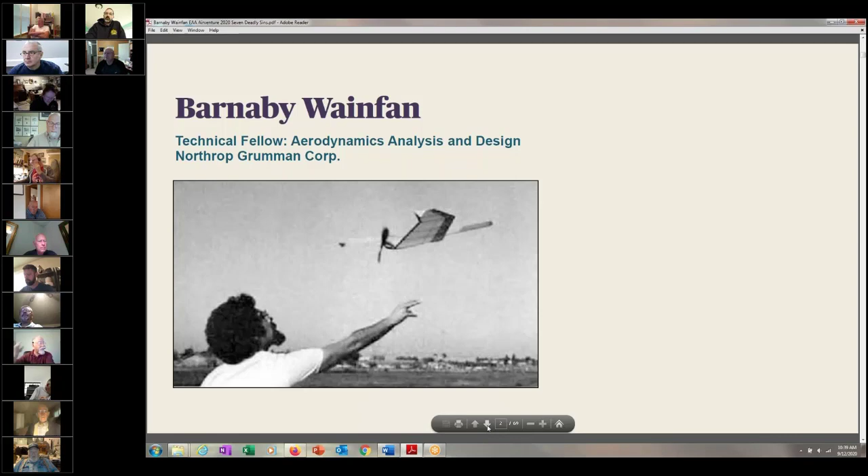As you can see from this picture, I got my love of conventional configurations very early. I am sorry to say I have much less hair than that now, but nonetheless, I've learned a lot in those 41 years, and I'm hoping to share some of it with you today. Here's just a quick snapshot of a few things I've worked on. Some of them will be very familiar to you, obviously. As of today, I've worked on 27 different types of airframe that have actually made it into the air, and I'm far from done.

But the real subject today is about design. I do try to teach design, and what I found is that we spend a lot of time teaching people how to design things right, and where there tends to be a failure of teaching is in learning from the mistakes of the past. And so the subject of today's talk is really about how it gets done wrong, so that we have the wisdom not to repeat those mistakes.

And here's a few quotes just to get us in the proper mood. I hope that this talk helps a little bit for people to become expert enough without having to do what Professor Bohr, the lower right quote, says, of making all the mistakes that can be made in a very narrow field. And of course, one of my favorites is from Norm Howell, who's a retired U.S. Air Force test pilot and a good friend. Norm says that nature is the world's toughest teacher because you get the exam first, followed by the course.

Of course, the other one of Norm's sayings, which isn't directly relevant here, but I've got to relate it, is that all the interesting in-flight emergencies start with a loud bang. Now, I disagree. My most interesting in-flight emergency started with a sudden silence, but, you know, Norm and I.

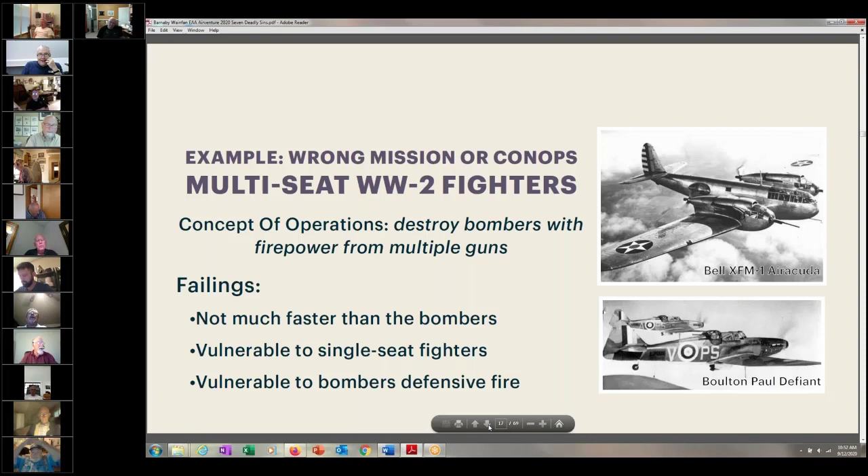Now, in the commercial world, there tends to be a flawed business case. And the thing you see over and over again is a tendency to take what's already being done or what's already important and extrapolate it to the point of complete failure. So if you go through these various ones, I mean, SSTs, and interestingly enough, the idea of supersonic business jets and so forth is coming back again. And they're all based on the idea that what the airlines were selling was speed.

And if you look at it up until the 1960s or so, that was a perfectly valid assumption. Each generation of aircraft was faster than the one before. What originally got people flying was it was a lot faster than trains or ships. And so the idea was the next step after the 707 and the DC-8 was to go supersonic. And the customer base were people for whom time was important and money wasn't.

And what ended up happening about the time the first generation SSTs were being developed is the world changed. Because first of all, the high bypass turbofan and wide body airplanes came along, and that made flying subsonic much cheaper. And secondly, it turned out that subsonic airplanes were fast enough that for most trips you could still get where you wanted to go within a day and have a little bit of useful day left at the end.

Now, this was obviously in the world before the TSA, but nonetheless, on a subsonic airliner, even if you're going Los Angeles to New York or something like that, you're talking 5 to 6 hours. And so the speed advantage of the supersonic airplane was much, much less, and the cost was much, much higher. So it turned out that the only SST that did any prolonged service was the Concorde. They only built 16 of them.

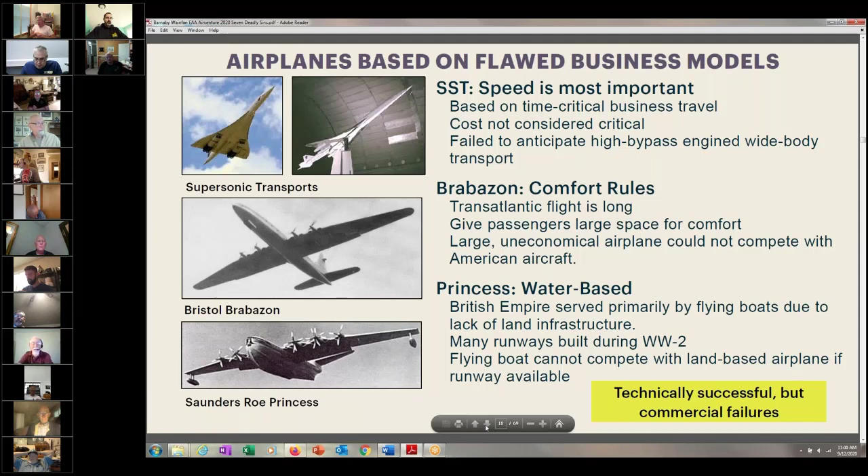But they built 3 Princesses, only one of which flew, and nothing wrong technically with the airplane. It worked as designed, but it wasn't actually useful to the end user to make money. This type of mistake didn't go away 50 years ago. We're seeing the end game right now of yet another flawed ConOps extrapolating to failure, once again in Europe, with the Airbus A380.

The basic concept behind the A380 was that, at the time they started it, long-haul airline operations were hub and spoke. You went from big airport to big airport, and then people would get on smaller airplanes to go off to wherever they were going. And that was the efficient way to do it. That was basically the business model for the 747.

The other idea was we're not building any more runways, so the number of takeoff and landing slots at these major hub airports is finite. Because air traffic control can only handle so many, and particularly with big airplanes, you need a certain amount of separation for wake turbulence. And so the basic idea was that they needed a very, very big airplane to accommodate the increased amount of passenger traffic, because at some point you were going to saturate the hub airports. There was also a bit of prestige at having the biggest airplane.

Well, what ended up happening, of course, was that the airplane was too large for most airports, and they actually had to do a lot of new infrastructure for taxiways and gates to accommodate it. Most of the airports didn't want to do that. Now, interestingly enough, that issue has reappeared with the Boeing 777X, which is why Boeing is now flight testing an airplane with wingfold. The 777X actually has the outer few feet of each wingtip fold up on the ground so it can use standard taxiways and gates.

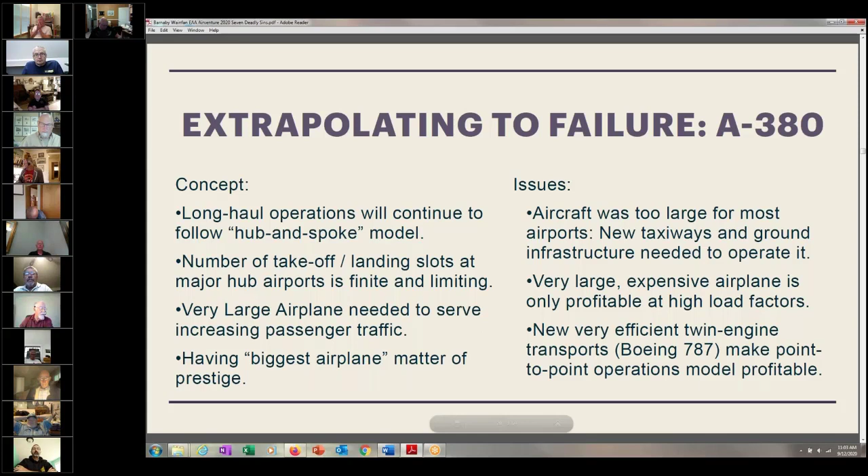And if you take a look at what this did to Airbus, if Airbus didn't have lots of cash available to it from reasons other than selling airplanes, it probably would have put them out of business, because it cost about $25 billion to develop this airplane. And the interesting thing is they never reached what in the trades they were calling break even, but they had actually redefined the word break even, because the production rate fluctuated all over the place, to mean that they were actually charging more per airplane than it cost to build. So they were actually, for most of the production run, taking a loss per airplane that they delivered, which means that they didn't recover any of the development cost, any of the non-recurring cost at all.

In February 2019, they announced the end of the program with an extrapolated 251 total airplanes delivered. By that time, some of the airlines were already retiring their A380s, and of course the current pandemic situation has accelerated that. So the net result is that this program will end up with about 250 airplanes having gone into service, and probably led to a net loss of something like $30 billion for the people who developed it. And all basically because the business model didn't hold together.

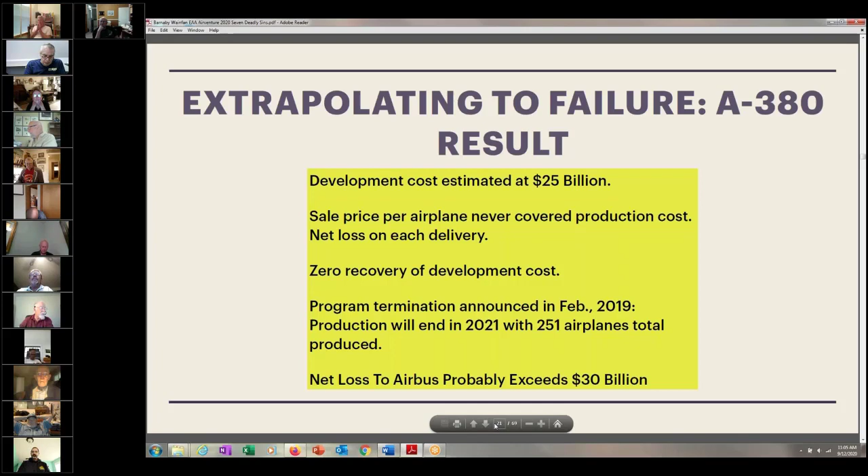Another thing that can happen is that you can over-constrain the design. You can either ask it to do too many things or put too many limitations on it, and all of those things affect the airplane, and it becomes difficult to impossible to make an airplane that will actually meet all those requirements and do the mission effectively.

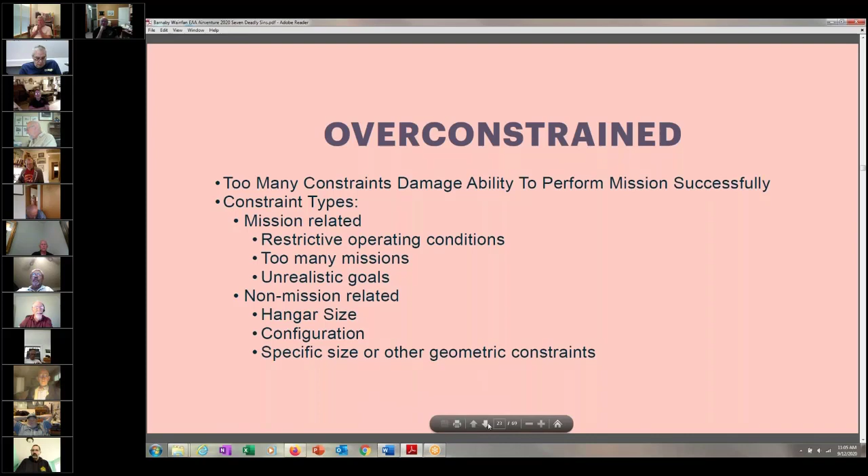One good case study for this one is the F-111, which ended up actually being built in various forms because it wasn't a total failure, it was a partial failure in some respects. But the original idea for the F-111 was that it was going to be an airplane that was going to be operated by both the Navy and the Air Force.

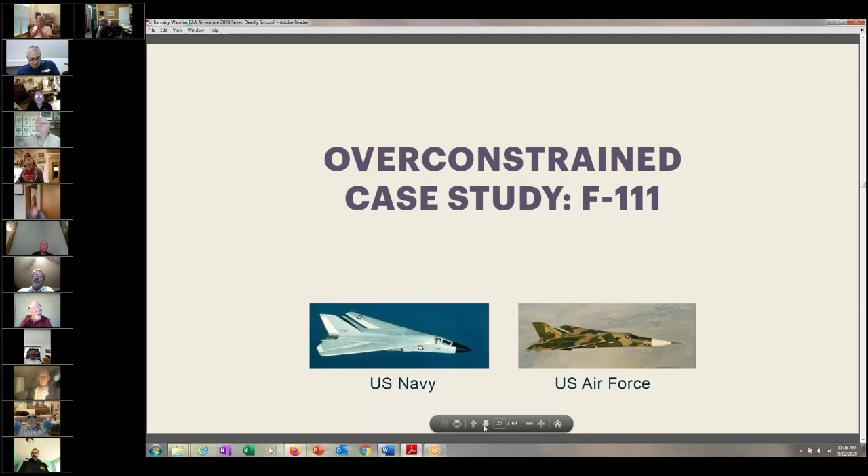And, for those of us who are students of history and are watching current events, some of this should sound very, very familiar. It was a program called TFX, Tactical Fighter Experimental, one of the amazingly many things Robert McNamara got wrong. And the idea was that one airframe was going to fulfill multiple missions. It was going to be the fighter and interceptor for both the Air Force and the Navy. So it was going to do intercept, counter-air, fleet defense. And it was also going to be a strike aircraft for both the Air Force and the Navy.

And the basic idea here was, because it was a common airframe, you were going to get enormous economies of scale and make it cheaper for everyone to build a force structure. I'm sure some of this sounds familiar, even if one reads current events.

But if you take a look at what that meant for the engineering of it all, you have all of these requirements. First of all, the airplane was required to be supersonic at sea level, Mach 1.2 at sea level. And the loads on the airframe are just ferocious for that. At the same time, it had to go a long way subsonic and have long loiter for fleet defense. It had to be carrier suitable, and it was a 2-crew aircraft, and given the state of the avionics and the equipment at the time, it was decided that you needed to have good crew communication, which led to the following

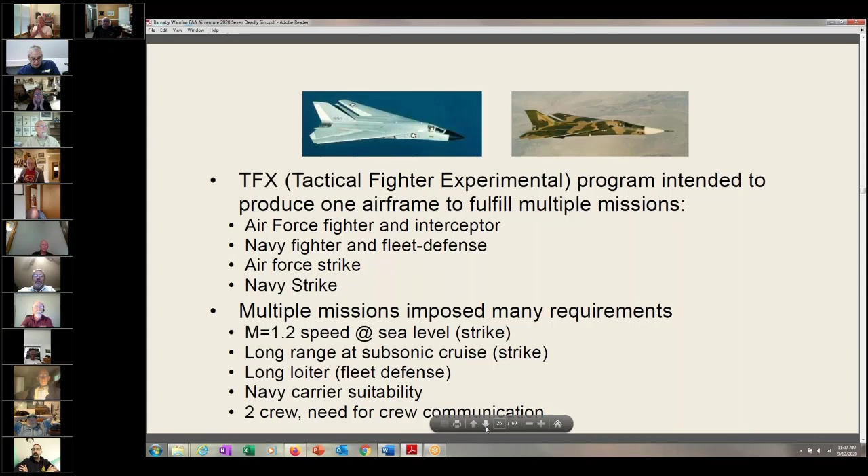engineering decisions and requirements. The reason the airplane ended up being a swing wing of variable geometry was because the high-speed, low-altitude mission is incompatible with the subsonic loiter and range mission for the same geometry. If you're going fast at low altitude, you need a slim, highly swept, high wing loading airplane, like a delta wing. If you're trying to go longer subsonically, you need more span, lower induced drag, and a higher lift to drag ratio. And also, you're not going to get a slender delta on and off a carrier.

They decided that you needed side-by-side seating for good crew communication, and in order to have low enough drag to be a good supersonic airplane at low altitude, bury the cockpit for a flush canopy. All of these requirements made the airplane very heavy. One of the requirements was for the crew to be able to successfully eject at Mach 1.2 at sea level, and of course the dynamic pressure there is ferocious.

So it was one of 2 aircraft to end up in service that actually had an escape capsule rather than ejection seats. The whole cockpit ejected as a unit. The other airplane that did this is the B-1 with very similar requirements. And of course, the high dynamic pressure at Mach 1.2 at sea level made the airplane very heavy.

So how did all of that turn out? Well, the Navy airplane never saw service. It was too big and too heavy to ever really achieve carrier suitability, although they did manage to do some demonstration takeoffs and landings on carriers.

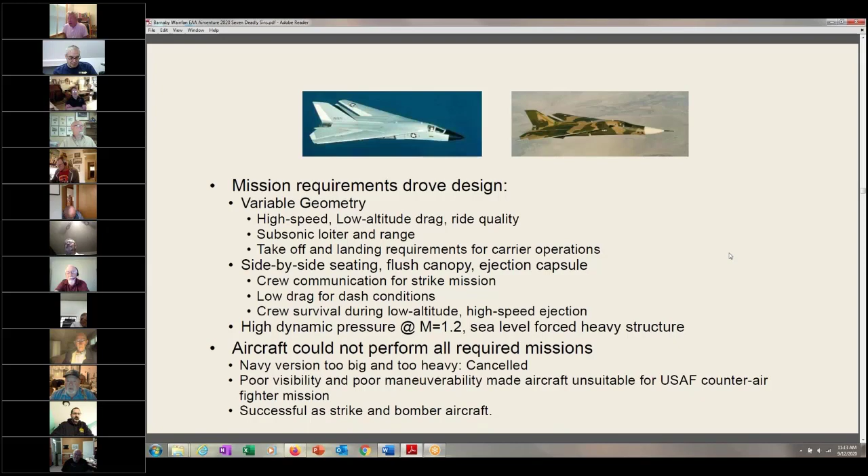Another quickie, this one, once again from Britain, and I'm not slagging on the Brits, by the way, but they did an awful lot of interesting things over a lot of history. I mean, any country that brought us the Vulcan and the Spitfire can't be all bad in the aviation world. But here's an example of where one little constraint ruined an otherwise good airplane.

So once again, committed to combat over Europe, took pretty severe losses from ground fire, particularly in daylight operations. Even in night operations, it got hit pretty badly compared to the Lancasters and later, the American bombers. And so was eventually withdrawn from service over Europe and used for maritime patrol and things like that. But this is an example of a case where one single constraint took an otherwise good airplane and created a critical vulnerability.

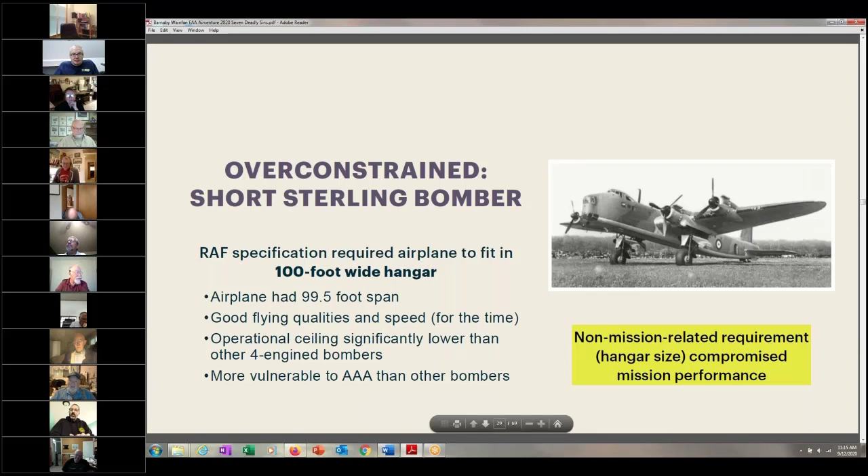Okay, moving on to something depending on new technology. We always try to advance the state of the art, and a new technology, if it works, can give you a great advantage. But if it fails and the project is dependent on it, the whole airplane fails. And of course, we tend to be optimists. This is one of the other themes through all of this. We're all optimists at the beginning of preliminary design, and then get our steady doses of reality until we're at, okay, now does this thing still work?

So if it's not an experimental program, if it's a program where the airplane actually has to work and go into service, it's very important to have a plan B if the advanced technology doesn't pan out, or at least be aware that that could happen.

Case study here, this dates back to the early 1970s, at a time when, and once again, this is another kind of overlapping sins, the ConOps that was being developed, people believed at the time that in the future, which to us now is the relatively recent past, military aircraft were going to go all STOVL or all VTOL because runways were too vulnerable. And so there was enormous amounts of work being done on developing VTOL fighters and other aircraft.

When I came out of engineering school and started my engineering career, the Navy believed that the big deck carrier was dead and they were going to have smaller ships called sea control ships, and they were developing two types of aircraft, type A VSTOL, which was going to be a fighter, and type B VSTOL, which was going to be a patrol aircraft to replace the S-3. And this aircraft here was an X-plane developing a whole new system of generating vertical lift. It was called the XFV-12, developed by Rockwell.

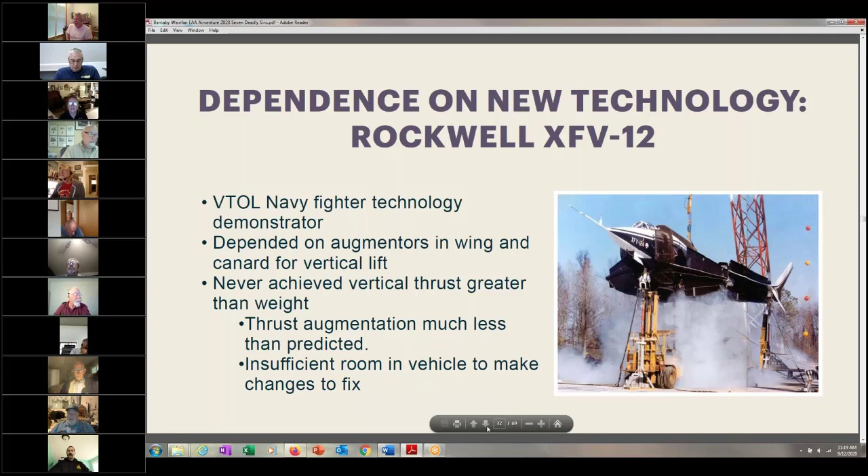But sometimes you have a situation where you have no choice but to try to use new technology. Sometimes you get a mission specification where you have to invent something to do it. And then basically you're betting your program on making the new technology work. And a good example of that is the Joint Strike Fighter.

But basically, if you look at this from an engineering viewpoint, each of the companies, because the airplane had to be a short takeoff, vertical landing supersonic fighter, made a bet on a new technology. So Boeing decided to stay low risk on their propulsion system. They said, what we're going to do is refan basically an F-22 engine, an F119 engine, to increase the mass flow and increase the static thrust.

We're going to use a proven Harrier-style vectoring nozzle system and direct lift because we know that works. That somewhat limited the amount of vertical thrust they could get, so they ended up having to make an airplane that was very light. This is the reason for the low aspect ratio delta wing configuration.

And frankly, even though the airplane is not one of the most beautiful things to ever fly, if you look at the structural integration of the airplane and some other details of how it was done, it's a very clever design for trying to build a structurally weight-efficient airplane to keep the weight down and still get the aerodynamic performance. But that didn't quite get them where they needed to get, so they were going to use a new thermoplastic resin system in the wing skins to save weight.

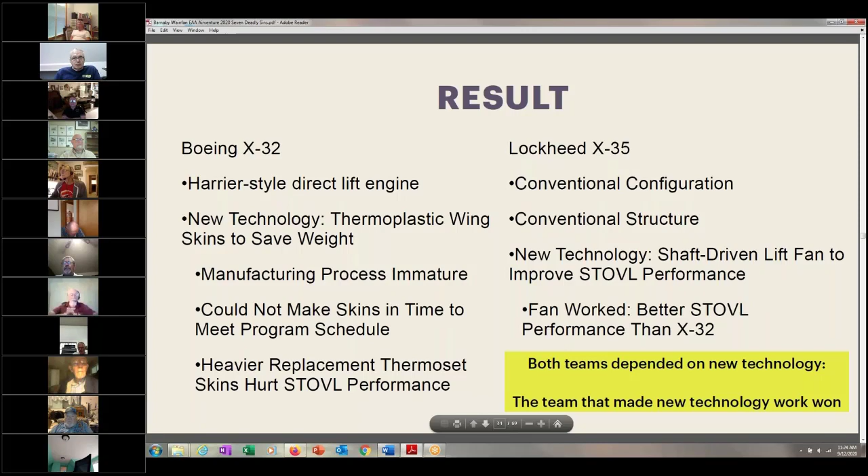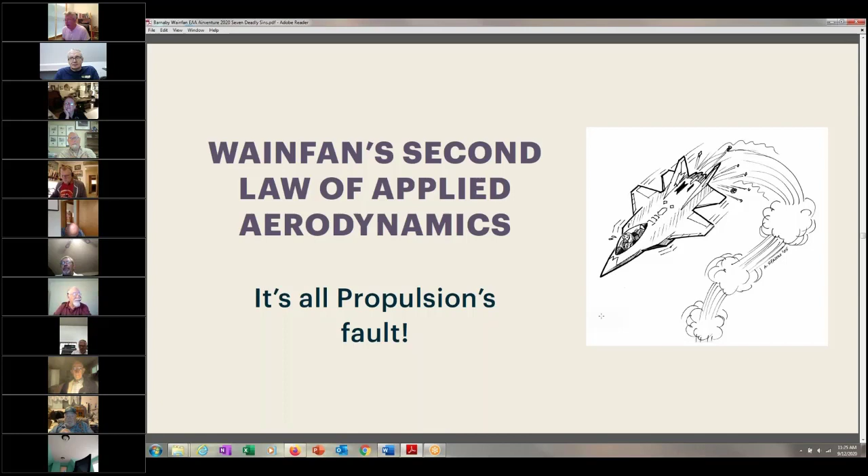But the real point here is that unless you're building a glider, the success of the airplane depends on the success of the engine. And the engine has to perform up to snuff. And if the engine doesn't deliver either in weight, thrust, fuel consumption, or reliability, the airplane suffers and may, in fact, turn out to be either useless or not meet its performance guarantees at all.

It's also a caution for airframe designers that you never design an airplane to the ragged edge of what the engine is supposed to be able to do, because aero guys and airframe designers are optimists too. And if the airplane ends up heavier or higher drag than predicted, which they almost always do, and you're designed to the limit of what the engine can do, you're going to end up falling short in performance.

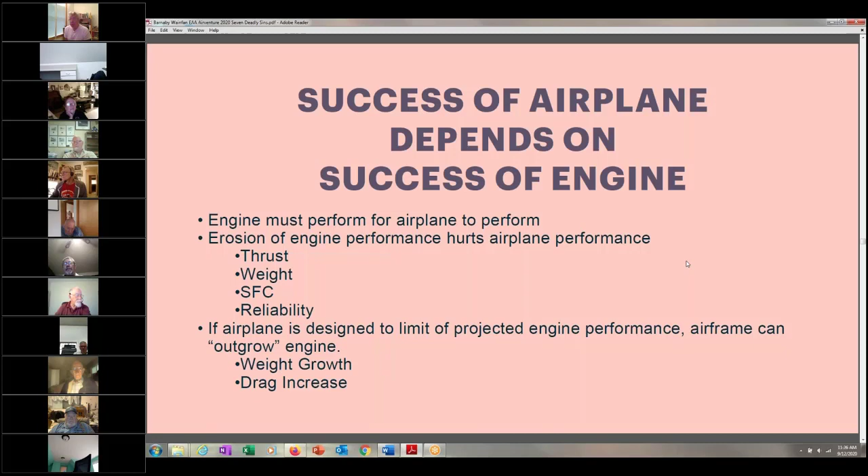So a case study here is one those of us who have been going to Oshkosh for years will recognize. It is, in some respects, one of the examples of Barnaby's law of aviation startups, which is the probability of success of the company is inversely proportional to how big their tent is at Oshkosh when they go up with their non-flying prototype or mock-up. And I think people remember Eclipse showing up with this enormous pavilion and this airplane.

But here's the basic idea behind the Eclipse. It was a very light jet intended for air taxi operations and personal use. And it was based on an engine that was being developed by NASA. A couple of years before the Eclipse appeared, Williams and NASA brought in a scale-built airplane called the Williams V-Jet to Oshkosh and announced, and this was when NASA still put a good bit of money into general aviation-related programs, that there was a new program called GAP, General Aviation Propulsion, and Williams was going to develop a 700-pound thrust turbofan engine that in full series production would cost $40,000 a piece.

Well, you know, a whole lot of people declared the miracle had occurred, that the piston engine was dead, and by 2005 we would all be flying jet Bonanzas, and only a few puddle jumpers and people flying antiques would still be using piston engines.

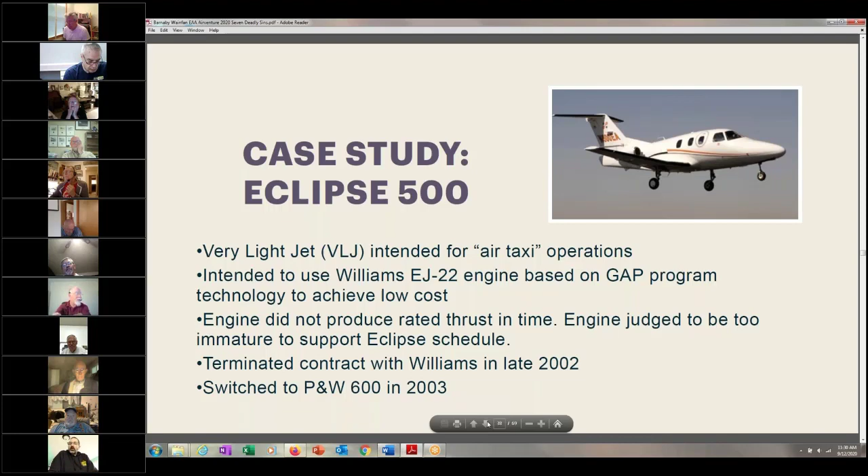So in any case, in 2002, Eclipse terminated their contract with Williams, went to Pratt & Whitney and switched to the Pratt & Whitney 600 engine. The Pratt & Whitney 600 engine had higher thrust, was a good working engine. And then the dominoes started to fall. Because first of all, the program is now 3 years behind schedule. The price of the airplane has now risen because originally Eclipse claimed that with this magic engine and some good manufacturing technology, they could actually deliver the airplane for less than $1 million. By the time they actually had a certified airplane to deliver, it was 2.1 million and rising.

Higher thrust engine, which of course burns more gas. So even with the modifications to put tip tanks on it and an 850-pound gross weight, 18% gross weight increase, they still were 12% down on range from the original projections. All of which, of course, makes the airplane less desirable. But the most important thing is their business case fell apart because part of the whole idea behind Eclipse was that they could offer a much cheaper airplane with these new magic engines, and that was the reason to buy an airplane from a startup company.

Once you're competing with Cessna, delivering an airplane which is powered by the same engines as the Cessna, because Cessna developed the Citation Mustang around the Pratt & Whitney 600 engine, the 600-pound gorilla is back in the room. And business jet operators and private jet operators, the thing they care most about is reliability and dispatch rate. They care a bit about cost, they care a bit about fuel burn, but they want their airplane to be ready to go when they want to go. Those airplanes are for on-demand transportation.

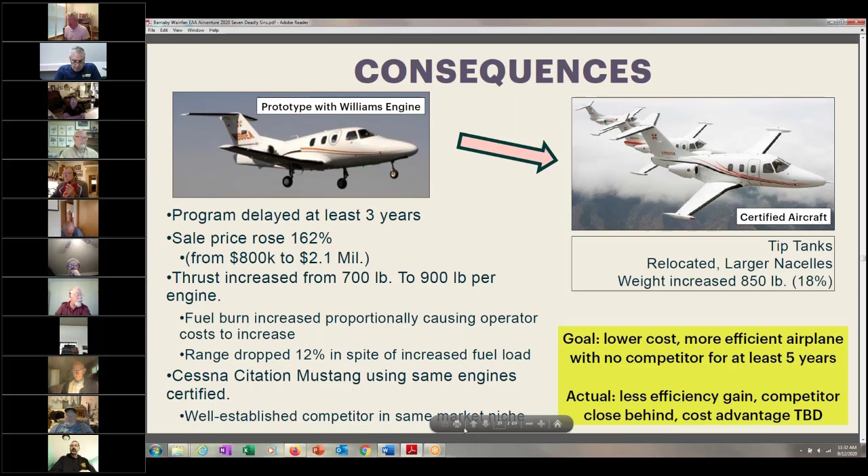And of course, with a Cessna product, because they're very good at it, they build reliable airplanes and they've got great service. And if you're deciding to buy an airplane, that 5 years from now, if I'm down somewhere and my left outboard flap actuator is broken, I can call Cessna and have one there in a day and get my airplane back in the air. And I don't even know whether Eclipse is still going to be in business. So in the end, the business case for Eclipse fell apart, leading to this very long tail of woe.

The original Eclipse delivered 259 airplanes, a lot of which were in an interim configuration because they were developing the avionics, they were developing a lot of things. So some of them weren't even IFR legal when they were first delivered. In 2008, Eclipse went bankrupt and a new company bought the assets basically to support the owners. Just to add insult to injury, in 2011, there was an AD on the Pratt & Whitney engine, which fortunately was eventually relatively quickly resolved.

And this Eclipse Aerospace was trying to get to the point of building airplanes. I don't believe they ever finally did succeed in delivering new airplanes. And they were eventually merged into a company called One Aviation, which was developing both an advanced version of the Eclipse and a turboprop airplane called the Kestrel. And then in 2018, One Aviation went bankrupt. Now, I read about a week ago that One Aviation may in fact have found a buyer, and so we may see yet another iteration of the Eclipse.

But at this point, we're somewhere between $2 and $3 billion into this saga to get about 250 airplanes into service. And it all goes back to the fact that the whole program was dependent on the promises of an engine.

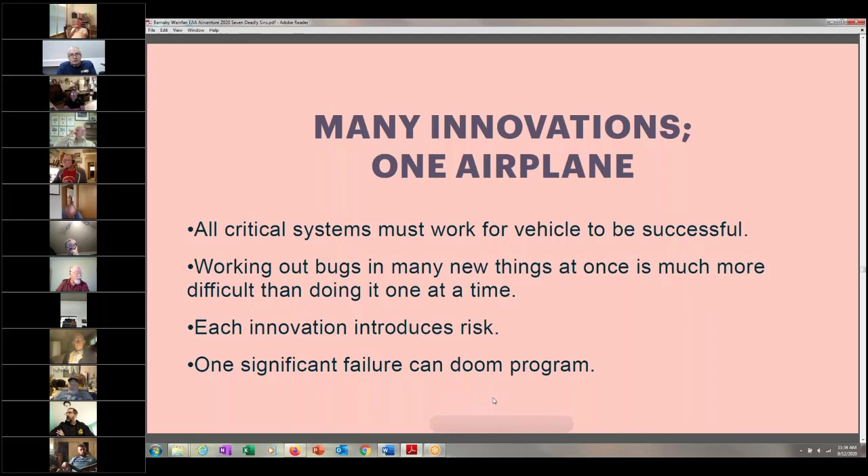And so the real lesson out of that is use the innovation where there's a chance to get a big benefit. And otherwise, stick with conventional practice and just make it work. Ironically, by the way, just a story from my history, if you look at the Facetmobile, it used very conventional materials and what I believed at the time to be a very conventional propulsion system because I was taking a lot of risk with a radical configuration. Well, of course, the great irony for me, it was the very conventional propulsion system that failed and put me through a fence. The radical part worked great.

But nonetheless, a quote from Freeman Dyson, and this rings very true for me because I'm an engineer who was raised by two scientists. Both my parents were research scientists. A good scientist is a person with original ideas, while a good engineer is a person who makes a design that works with as few original ideas as possible, because that's the low-risk design.

So here's a case study, and once again, this is slightly forgivable because it was an experimental airplane, but they tried to test everything at once. This was the Lockheed X-33, which was a test vehicle to prove technologies for a single-stage to orbit space launch vehicle. And if you look at this thing, it had a huge number of innovations in it. It had a type of engine called a linear aerospike that had never been flown before, a whole new type of rocket engine. It had composite cryogenic tanks for the liquid hydrogen. It had a whole new metallic system for thermal protection and a new lifting body aerodynamic configuration, all wrapped up into one.

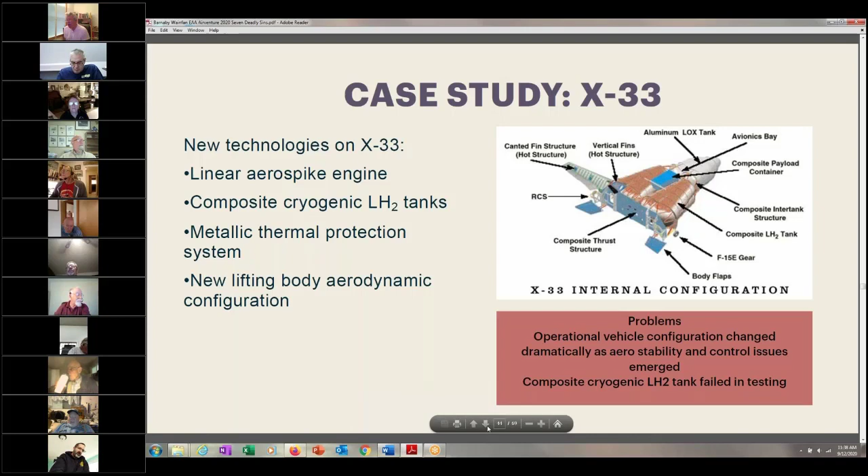Related to that is a design margin. It's very tempting when you're starting with a new design to eke every last tiny little bit of performance out of it everywhere, and to design right to the very limit of what can be done. Well, if you have to do that to get an airplane that meets your design specifications, you're probably going to end up falling short, because there's a lot of ways that you can end up doing not as well as you wanted.

The airplane almost always ends up heavier than predicted. Sometimes the engine doesn't produce as much thrust. Sometimes it burns more fuel. Aero, the drag may be higher than predicted. And even if you get everything right, your customer will always want to add more payload after you build the airplane.

So what it means is, when I design an airplane, I want to make sure that there is some margin, so that either the airplane can do a little bit more than it was designed to do, or there's straightforward ways of changing the airplane to get that extra little bit to meet the requirements as these things happen.

Now, this is one of the reasons why the conventional wing body tail airplane has lasted for so long: it's relatively easy to change. You can put a bigger wing on it, you can put different flaps on it, you can put a bigger tail on it. The podded engine arrangement is great in the airliner world, because you can take those engines off and put bigger engines on. There's lots of ways to change that airplane.

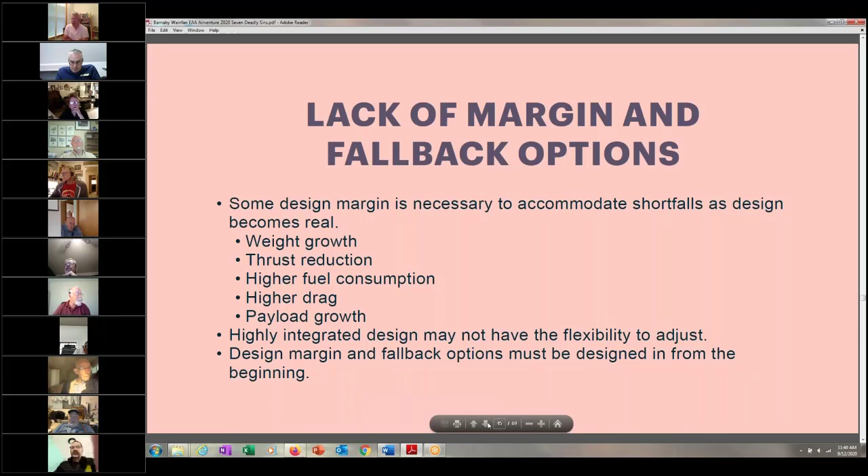And a case study for that is the A-12 attack airplane that was designed for the U.S. Navy. I have a certain amount of personal culpability in this one, because the A-12 program actually started as a result of an unsolicited white paper from Northrop that I helped write. And it led to a competition in which the Navy eventually chose the other guy's airplane. There's a good book about this program called The $5 Billion Misunderstanding, which I highly recommend, because it's a great case study in how not to develop an airplane.

In any case, General Dynamics and McDonnell made promises that they could do things that Northrop was not willing to promise they could do. They got the contract, and then it turned out they couldn't do it. Because basically what happened with this airplane is, as they started building, it ended up much heavier than they predicted, because they were very naive about what could be done with composites. And if you look at the configuration, there's literally nowhere to go as the weight starts to grow, because it's a pure triangle.

You can't put a bigger wing on it. It is the wing. You can't change the sweep angle, because everything's integrated, and the wingtips will hit the island if you do. Because it's a tailless airplane, there's no way to put more flaps on it to get more lift. And so they were stuck. And eventually the predicted weight of the airplane grew to a point where the wind over deck required to launch it exceeded the top speed of the carrier. And at that point, the program was canceled, and it was actually canceled for default.

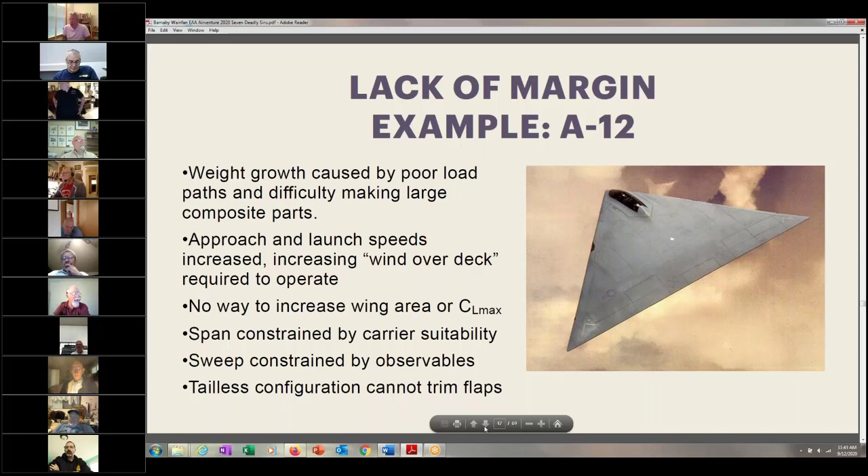And as I said, this was a very, very expensive mistake, and it all started because Northrop wrote a white paper saying we can build a baby B-2 to get on a carrier, and the government decided to compete the program instead of giving it to Northrop individually. So I guess I can claim to have helped start one of the worst debacles in the history of American aircraft procurement, but it wasn't my fault.

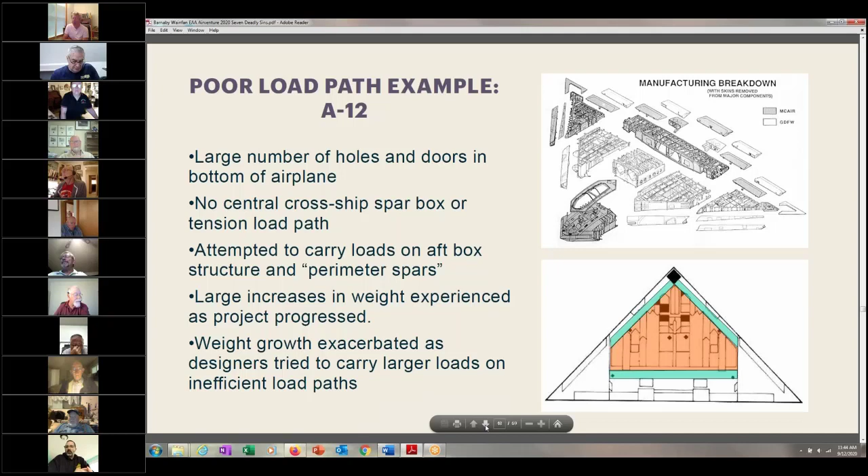Okay, getting on to our last one, and this is once again very common in EAA and common in other areas, is falling in love with a configuration and letting the concept drive the design instead of the mission. And the reason this is done is because people believe the concept offers some vital advantage. And at some point, preserving the concept becomes more important than the suitability of the configuration for the mission.

Now, the advantage may be real, but sometimes it either doesn't apply to the mission very well, or there are offsetting disadvantages. So even though it does the thing that people believe it does, there are other things it does that are worse.

And one warning to a designer is if you start having to make lots of compromises in your design to keep the concept pure, like, for example, having to put in movable ballast to make a weirdly configured airplane balance, or as we'll see in a moment in the case of the Starship, having to use a variable geometry canard and invent a new flap system, the concept is probably trying to tell you it doesn't want to do what you're asking, and it's telling you that it's not suitable for the mission.

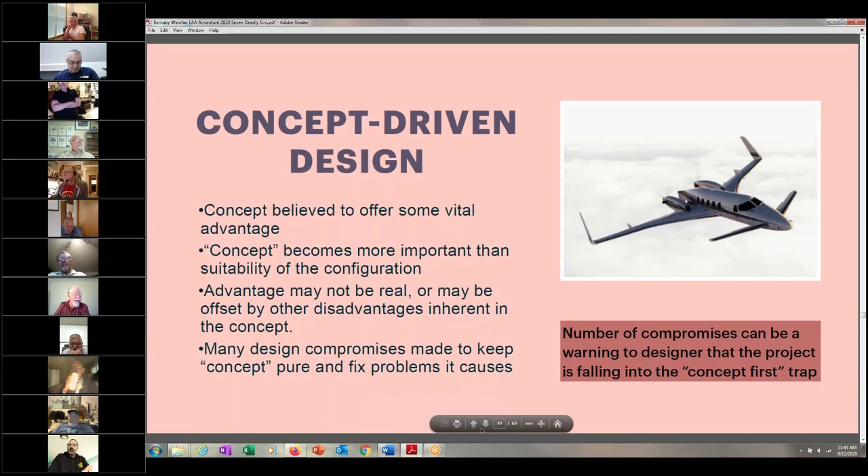And this is an issue that's gone on in history, because it seems like every era there's a magic configuration that everybody thinks is the answer to all problems. So I'm going to just flip through a couple in history without going into any detail. But if we go back to, for example, World War I, we had triplane fighters. And once again, sometimes some of these are successful, but they also have drawbacks that cause a short life.

More recently, the aft tail pusher concept. And once again, you guys will probably recognize most of these airplanes. A couple of them actually met their performance numbers, but weren't particularly successful commercially, and a couple of them were total disasters. Lots and lots in history on canard business airplanes, and we'll get into that in more detail in a moment. And more recently, a lot of interest in what people are calling a blended wing body, which is sort of a flying wingish configuration.

Once again, none of these configurations are first order stupid or a bad idea everywhere, but they have areas where they may offer an advantage and areas where they're not, and it's very important to make sure the mission drives the design, not the configuration.

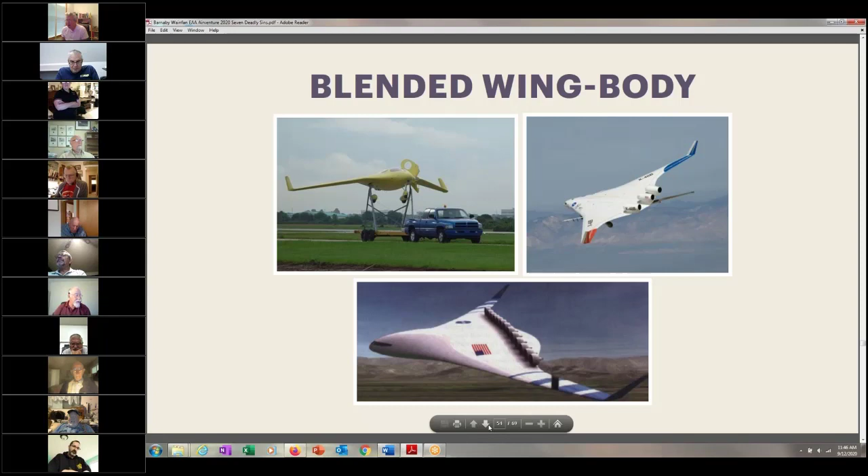So the last bit of this talk is going to be a case study about such an aircraft that actually made it into production and then failed rather spectacularly. And I want to preface this by saying that some very well-known and very smart people were associated with this program. And I'm only doing this case study as an example of how a program can get away from you. And this is in no way intended to be critical of or to put down the brilliant people who found themselves involved in this thing and gave it their best to make it work.

So the basic idea here. This is the Beech Starship, and the basic idea was that Beechcraft was building the King Air, and they wanted to get into the 21st century with a very advanced new business turboprop to replace the King Air. And so, they went to Scaled and ended up with the design for this airplane called the Starship.

Now, I've heard the story that this is not really the configuration that Burt Rutan really favored the most. He really wanted to do a 3-surface airplane, but because Beechcraft had already seen drawings of the Piaggio Avanti, they wouldn't let them do a 3-surface because they were worried about proprietary data issues. I don't know whether that's true or not. I know Burt later did do a 3-surface airplane called the Triumph, so there may be some credibility to that.

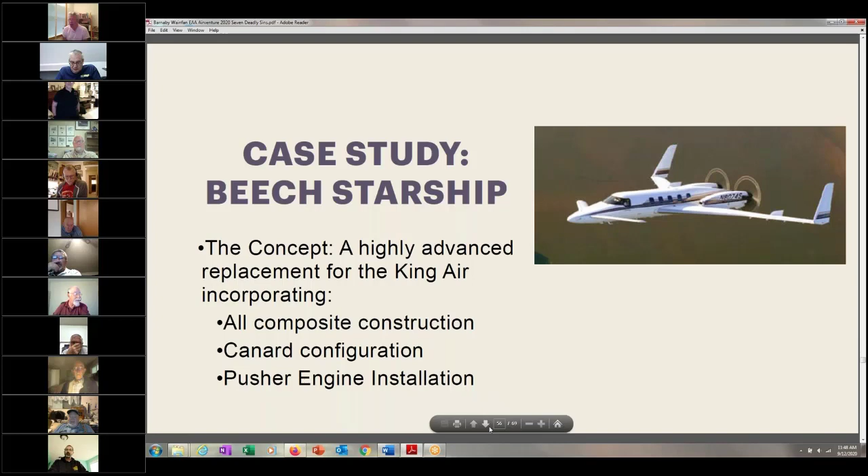But in any case, the whole idea here was, it was going to be an all-composite airplane. The canard configuration would supposedly take the advantages that have been demonstrated with the Long-EZ and pusher engine installation to make everything quiet and efficient. And so I'm not going to read all these, but these are all the advantages that were originally claimed for the configuration.

Well, how did it turn out? Well, if you just look at numbers, not very well. Both of the airplanes had about the same useful load. The Starship had 41% more power than the King Air, 700 horsepower more, and that brought 4.5% or 13 knots in cruise, and that's if you believe the manual. At the same time, the Starship was 20 knots faster stall speed, which is not good. It took almost 1,300 feet more runway to take off, and 500 plus feet more to land.

So if you simply take a look at this and say, I'm presenting the head of the aviation department of any business with the pilot's operating handbook for these 2 airplanes and deciding which one to buy, and the Starship costs more, it's a pretty straightforward decision.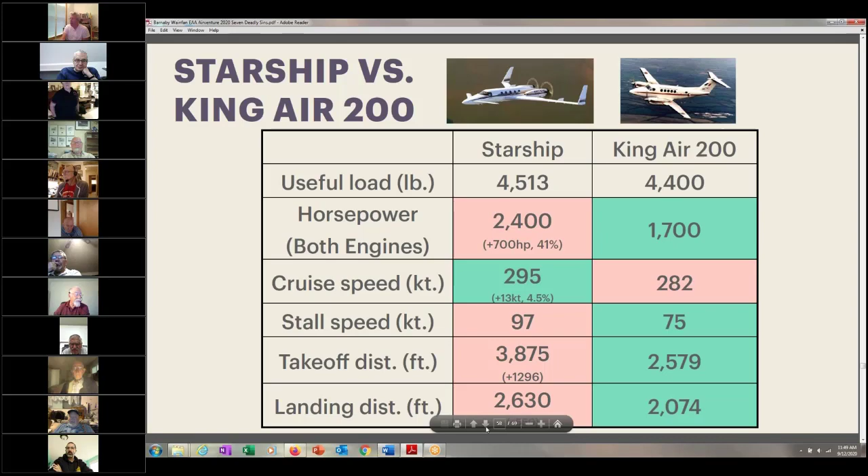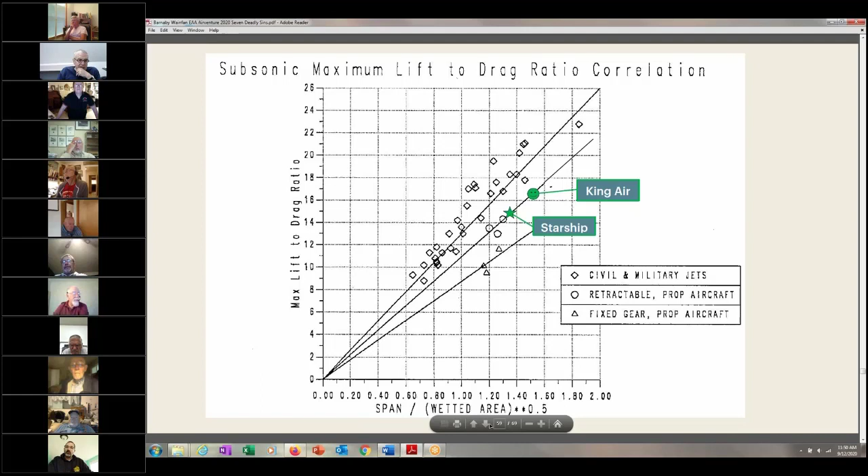But if we work that down once again into the weeds, you can see that the Starship had 350-ish square feet more wetted area than the King Air. So it was worse on that parameter. Also, because they were not able to get the weight savings they expected from the composites, it was almost 2,000 pounds heavier. And one interesting thing is when they started the Starship, the actual FAA max gross weight limit for an FAR Part 23 certified airplane was 12,500 pounds, which you can see for the King Air. Well, partway through the Starship development, the FAA increased that to 14.5, and I can only attribute that to lots of lobbying on the part of Beechcraft, because if Beechcraft had to fly the Starship at 12.5, it would essentially have no useful load, or it would have half its useful load.

And so what it turns out is that because the useful loads are the same, the useful load fraction of the Starship is less too. It's carrying less of its takeoff gross weight as useful load. So the Starship, in addition to being aerodynamically less efficient, is basically for the same payload toting a ton of extra airplane around. And it turns out that the transport efficiency of an airplane is directly correlated to the product of useful load fraction times lift to drag ratio, or span over the square root of wetted area.

So from first principles, you can see that you would expect the Starship to be about 3/4 as efficient at transporting payload as the King Air. And as a matter of fact, if you go do the detailed numbers, that's exactly what happened. And the sad thing is this is all knowable from first principles and could be used essentially to disqualify the concept from the start.

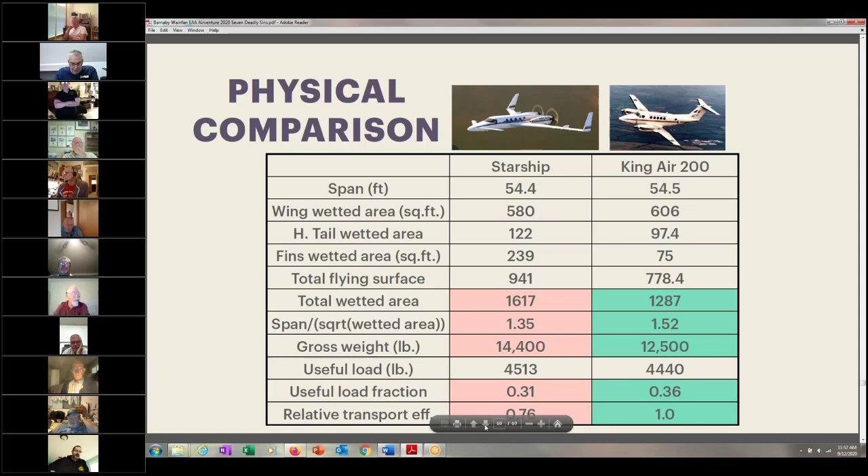And then they ended up, and I feel for these guys, they ended up getting bit by a lot of secondary things. Once again, I'm not going to go through this in detail, but what they ended up with the composites is that they tried to use composites in areas where composites weren't the lightest solution, because composites are very good for areas where there are high concentrated loads and you need high stiffness. They have high strength to weight there. But composites can't be allowed to buckle or wrinkle because they crack. And so anywhere where you're sized by minimum gauge, composites get heavy.

And also because composites are brittle, the FAA requires a higher factor of safety. They require a factor of safety of 2 on composites as opposed to 1.5 for metal. It was an early composite design, so they were very conservative. So in the end, the airplane ended up heavier in composites than it would have been if they built it out of metal.

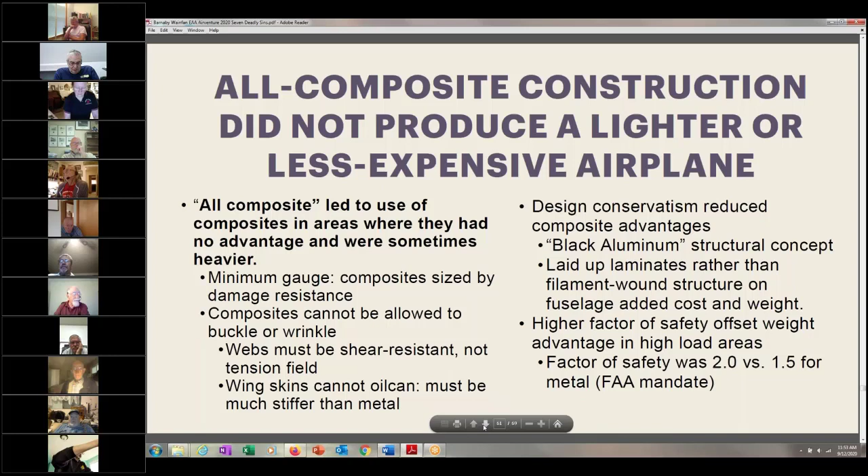And then once again, another lovely cartoon from Aldo. They got bit by a bunch of surprises caused by the unconventional configuration. And I'm going to go through all these pictures just to show you all the things that ended up. But one of the first things that happened is the Starship had a very interesting high lift system. Because the flaps are all the way in the back, you can't trim much flap with a canard without it pushing the nose down. So it was arranged with a variable geometry canard, so the canard swept forward as the flaps came down to compensate for the nose down pitching moment of the flaps.

Well, it turns out that the FAA requires you to stall the airplane not only in approach configuration, but in cruise configuration. And in approach configuration, you got the classic canard pitch nod, as the Long-EZ is famous for. The canard stalled first, the airplane pitch nodded, self-recovered, everybody's happy. But it turned out when you swept the canard back, it changed the aerodynamics of the canard enough that the main wing stalled first and the airplane pitched up. And the FAA said, that's not acceptable, you can't do that.

So they ended up putting vortilons on the wing to cure that pitch up. And they were successful. And they also ended up putting stall strips on the root of the canard to make it let go at a slightly lower angle of attack. And everybody's happy.

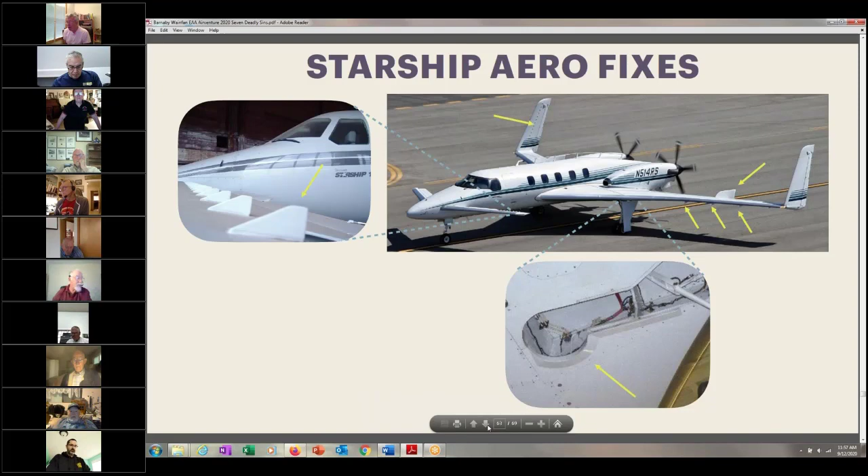So in the end, they built about 50 airplanes. Most of them were not sold. Most of them were leased. I think only 12 to 14 of them were actually delivered to a customer who paid full price. After a while, Beech decided, as the airplanes started to come back from lease, mostly from people who ended up buying Premier business jets, they didn't want to support this orphan fleet of airplanes.

There's about 5 Starships still flying, and one of them is owned by a gentleman who believes that the end of the Starship program was a terrible sin against all that is good in aeronautics. And he actually went to the scrapper and bought all of the spare parts and systems from most of the airplanes they scrapped. He's got a hangar full of parts that are probably enough to keep his Starship flying for 100 years.

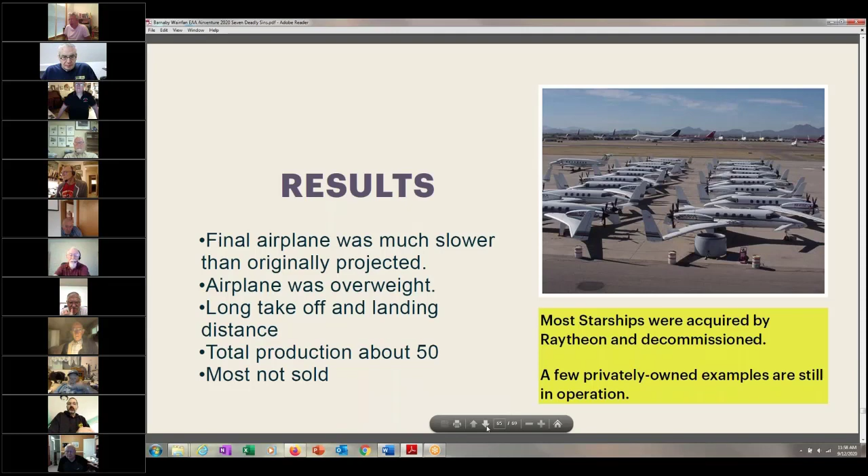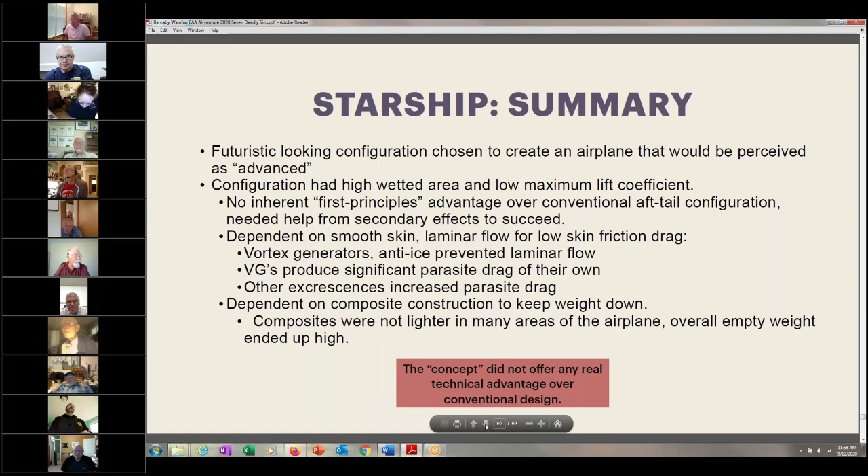So I'm not going to go through all this, but the real message here is that if you look at the concept from first principles, it was actually inferior to the airplane it was supposed to replace. And by falling in love with the concept, they lost sight of what the airplane was really intended to do and ended up at great expense producing an airplane that didn't perform as well as the conventional airplane it was supposed to replace. And so with that, a few bits of distilled wisdom.

These are Barnaby's rules for designers: you design for function, not design features, because a well-formed design beats a bunch of fixes flying in formation every time. That said, details do count. It's possible to scrap a good design with bad details.

One lesson from the Starship is you never, ever show a customer a configuration you do not want to build. If you show a customer 4 options, and option number 3 is a gratuitous straw man that you absolutely have no desire to build whatsoever, but you wanted to make sure it looked like they had a lot of choices, I guarantee you that is the one they will pick, and you will have to try to make it work. Like I said, there's a bit of story that the Starship was that.

Most problems warn you. So what looks like a negligible problem today is the seed of tomorrow's disasters. So fix it now, because you can't fix it later once the airplane is built. In the modern airplane world, there's a belief that you can cover a multitude of sins with programming a flight control system, but really you can't fix it in software either.

And no matter how good you are at telling a story, nature doesn't read PowerPoint. So you can have a fabulous briefing, but it doesn't make your airplane work, because fundamentally the universe does not care about you, and physics doesn't change no matter how much you want it to. And with that, I will give you my attempt at a pithy quote about such things, because we're playing with serious stuff, and that is: physics is not mindful of your wishes nor tolerant of foolishness.